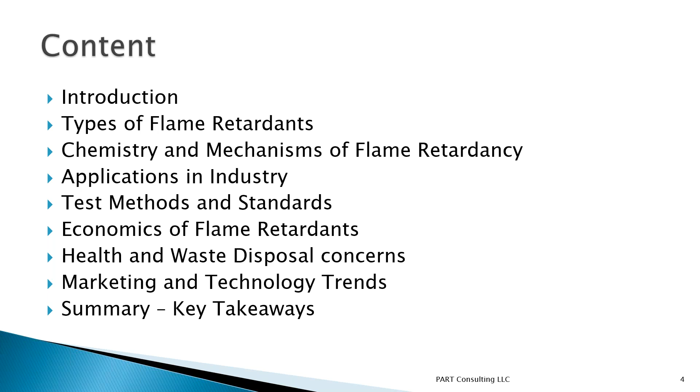And we're also going to talk a little bit about the economics and, very important, the health and waste disposal concerns surrounding flame retardants today, of which there is quite a bit out there. We'll also cover some marketing and discuss the technology trends that are happening today. And finally, at the end, I'm going to give you some key takeaways to view flame retardants and their uses today.

So moving on. The very first thing about flame retardancy is that we have to understand that we don't want to confuse this with flammability resistance. Flame retardant materials have been modified to decrease the effects of combustion. Basically, what they're looking for is to slow down or stop the combustion or burning process, okay? They can still burn, but they're modified. Flame-resistant materials, on the other hand, are materials that are inherently non-flammable, okay?

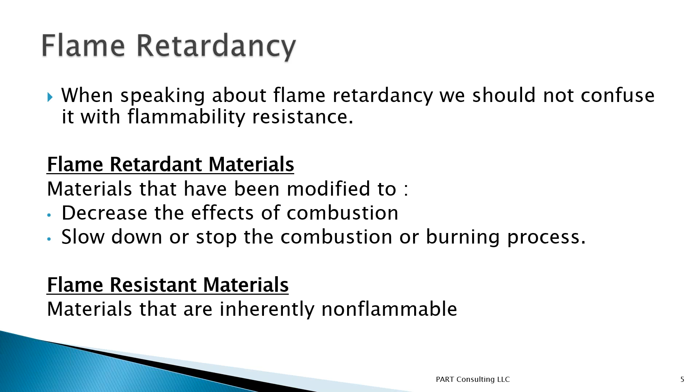So, talking about a fire, we talk very often about a fire triangle. You'll see this in an awful lot of literature, and very simply put, it's a triangle that has one side fuel, another side heat, and another side oxygen. These are the three elements that you need for a fire to burn and continue to burn. You remove any one of these elements and the fire becomes impossible. So, for example, if there was little or no oxygen, a fire could not occur regardless of the quantities of heat and fuel that were present.

Likewise, if insufficient heat is available, you can have any amount of fuel and oxygen and they won't result in a fire. What's not said in this, and what's not understood, is that there's a fourth element, and that is there has to be an ignition source. Unless the temperature gets extremely high, you need an ignition source, and very often it's another flame itself, or it's an electrical spark of some kind. So that's the fire triangle, and that is the mechanisms of fire.

So let's look at the material comparisons. So we have flame resistant, and that's things like asbestos, refractories, cement, ceramic, fiberglass. These are materials that basically are non-flammable: glass wool, minerals, and metals like iron, copper, and others. There are some metals that, under the right conditions, will burn, but generally speaking, iron doesn't burn, it'll melt.

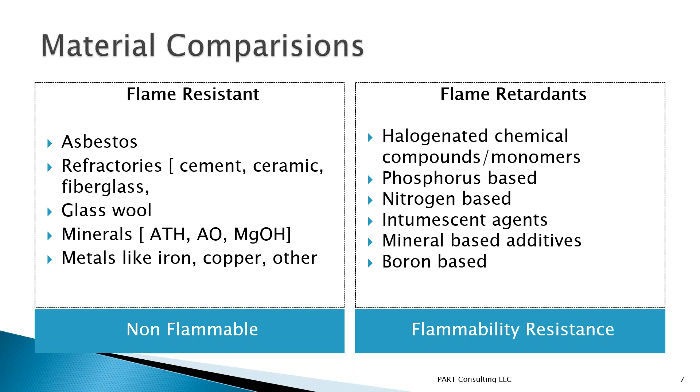And then there are intumescent agents, and we'll be explaining that further. This is usually a combination of things. And there are your mineral-based additives and boron-based flame retardants also. These are the major types of flame retardants that are available in the market today.

When we talk about flame retardants, generally speaking, everyone talks about two classes, okay? The first is reactive flame retardants, and the second is additive flame retardants. Reactive flame retardants basically allow you to pre-react the flame retardant into the backbone of the monomer that makes up the polymer. And so they usually form prepolymers, and these can then be inherently already flame retardant.

Additive flame retardants, on the other hand, are just simply ones that you can put into the formulation mixture at any time, and they do not chemically react. They are basically standalone ingredients inside the mix, kind of like sesame seeds inside bread. Doesn't become flour, doesn't become bread, the seed stays itself.

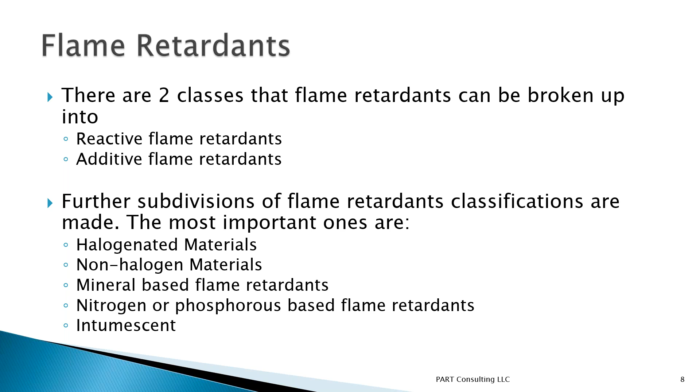The further subdivisions of flame retardant classifications are going to be what I just discussed: the halogen, non-halogen, mineral-based flame retardants, nitrogen and/or phosphorus-based flame retardants, and of course the intumescents. All of these can be additive flame retardants, and indeed they are probably the most predominant flame retardants available today.

The additive flame retardants is a physical mixing of the additive or additive package with the polymer. The additive remains as a separate molecule. This leads to a very flexible manufacturing approach to flame retardant addition. It's quite easy to add it at any step during the processes. It also then, by definition, lowers the cost of manufacturing compared to reactive flame retardants, which adds some extra cost, of course, to work that into the backbone.

However, reactive flame retardants do have their advantages. When they form a chemical reaction with a polymer, it creates a new species. The reactive flame retardant is now permanently part of the polymer. It's not going to separate out. And the issue is that it has to be done, generally speaking, by the chemical manufacturer, because they have the equipment that is necessary to do that reaction on an industrial scale.

The reactive flame retardants are resistant to blooming effects that you can see with additive flame retardants. That is, in an uncured state, when it blooms during the curing process, these materials can come out or separate out of the polymer mixture, and they can form a layer on the surface. Blooming is not a desirable effect, and you don't see it too much today, but it was at one time a particularly difficult problem.

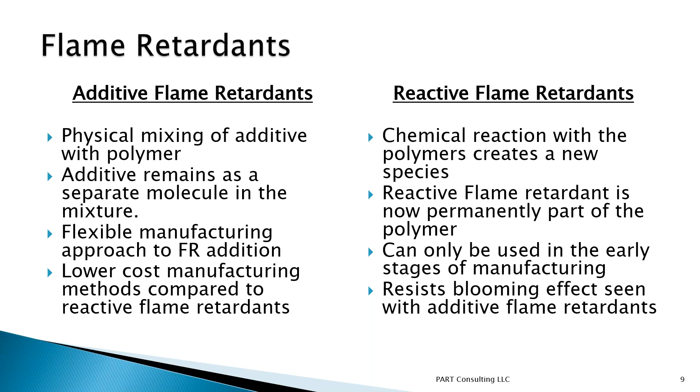Additive flame retardants are simpler. They can be lower cost, not necessarily all the time. And the main advantage is that if you have a formulation, it's much faster to market if you have an additive flame retardant in there. The limitations are blooming. Processing can be difficult on the equipment. Some of these flame retardants can be corrosive, can be abrasive, and they can affect wear and tear on equipment. Also, the disadvantage to additive flame retardants is in some cases, depending on what you're using, you're going to have very high loading levels. It isn't as efficient as reactive flame retardants.

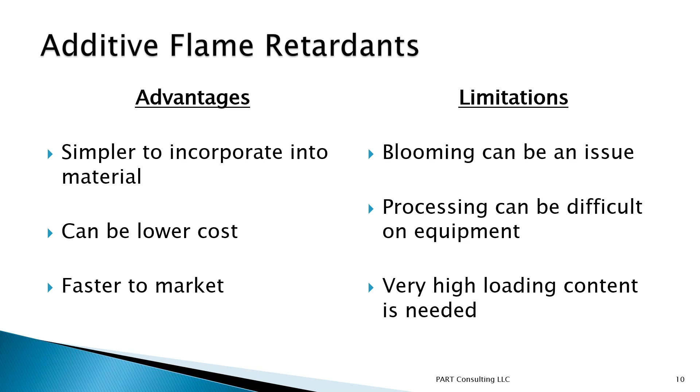The reactive flame retardants, generally speaking, have better properties overall, better physical properties, thermal, mechanical, even electrical. They're typically easier to process because it's a simpler material at that point. It's one material. And they have much higher temperature properties, generally speaking. When you have additive flame retardants, you're dependent upon the lowest performer. The other thing also is for manufacturers, they are a proprietary material, and so they can have a business advantage that way.

The difficulty with reactive flame retardants is that TSCA and REACH can be an issue. If you're making a new molecule with a reactive flame retardant, you may have to TSCA list it and try and get it into REACH, which is time consuming, expensive, and it doesn't happen overnight. There are going to be fewer additives needed with it, and the cost of all of this, of course, can be an issue because it costs quite a bit to TSCA list or even to get something onto the REACH list. So you're looking at a minimum of typically 6 months or 1 year, really, to get at least the TSCA listing. REACH is, I think, even more difficult.

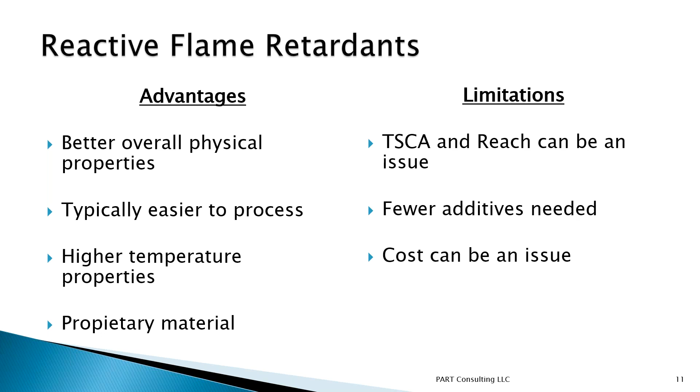Okay, the major places where flame retardants today get used is in furniture, anything from office furniture to household furnishings. Textiles, baby clothes used to have it. Some do and some don't, I believe, today. And it is best known also for industrial work clothing. Electronics are big on flame retardants. Printed circuit boards, cabling, enclosures of all kinds, they all have one type or another of flame retardancy.

Electrical power generation, this is where you have your outdoor cables that bring power to your homes and to your factories from the power plant. Much of those transformers and other electrical devices, they are all flame retardant to a degree. The transportation area has a unique set of flame retardancy requirements.

Aircraft is probably one of the more difficult application areas, but there's also requirements for automotive, trains, buses, and so forth. Building materials: as composites continue to make inroads into the construction industry, flame retardancy is something that is needed. So that is becoming much more of a growing area for them. In actuality, they're using these things as coatings, adhesives, and as composites in a lot of these applications.

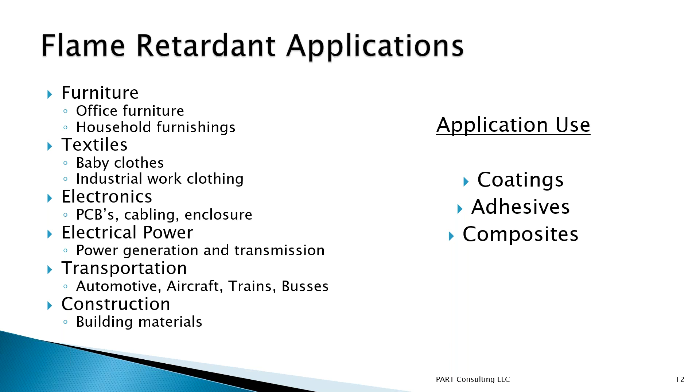So, how do flame retardants work? People break them down into any number of mechanisms. Some of them overlap, but I've broken them down here into three: endothermic reactions, barrier formations, and oxygen disruption. If you think of the endothermic reactions, that's the heat side of the triangle. Barrier formation cuts off the oxygen. And you also have oxygen disruption or temperature lowering, where it works in the vapor phase.

Endothermic reactions basically raise the need for energy consumption to sustain the burn state. Barriers are just simply that: when a flame gets started, the decomposition immediately creates a flame-resistant barrier. And oxygen disruption, your halogens are here. They basically react in the vapor phase, cut off the oxygen, and also interfere with the heat generation needed for fire stability, because they absorb the free radical ions which propagate the fire.

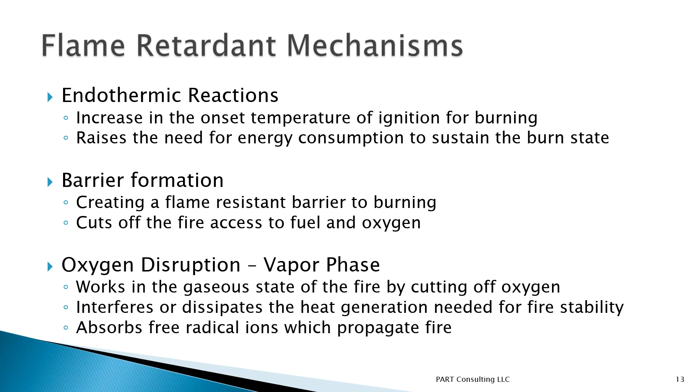So, examples of the fire retardant mechanisms are things like magnesium hydroxide and aluminum trihydrate. All of these things basically do one thing: they break down. The hydroxides and the trihydrates form basically water, so they reduce the heat and put a damper on the flame spread. Barriers are intumescence. Basically, a char layer forms, and it cuts off the oxygen, the access to heat, and the fuel from the flame. That's the way these things work.

Ammonium polyphosphates are typically in many intumescent formulations. Phosphorus flame retardants on their own do the same type of mechanism. And melamine, which is a nitrogen-based flame retardant, works in this manner also. Your gaseous state is brominated monomers, chlorinated monomers, and your nitrogen flame retardants. The melamines also give off nitrogen, which enters the gaseous state, so they work in two different ways. Brominated and chlorinated monomers also form a char layer to some degree, so they're very effective materials.

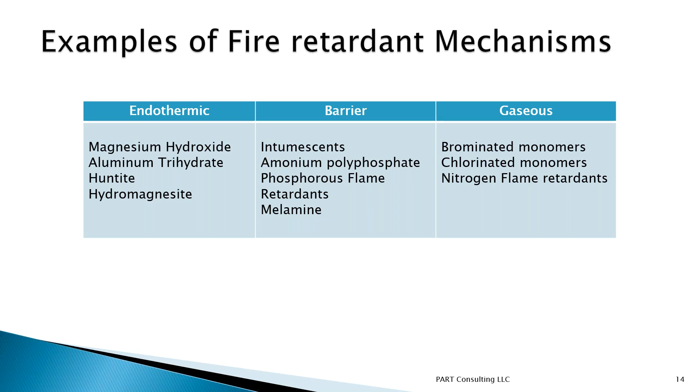Endothermic flame retardants break down when exposed to heat, and the reactions draw off the energy needed to sustain the fire. Basically, it's a fire hose. It releases water, which enters the gaseous phase and cools the fire, and with enough of the additive in there it can actually stop the fire on its own.

Gaseous state reactions involve a lot of chemistry, but basically the components of the flame retardant break down, and in this case you're seeing bromine. Bromine in turn reacts, forming HBr, and that process absorbs an awful lot of heat. The HBr then reacts with other elements in the fire and starves the substrate or the fuel of the oxygen needed to continue burning.

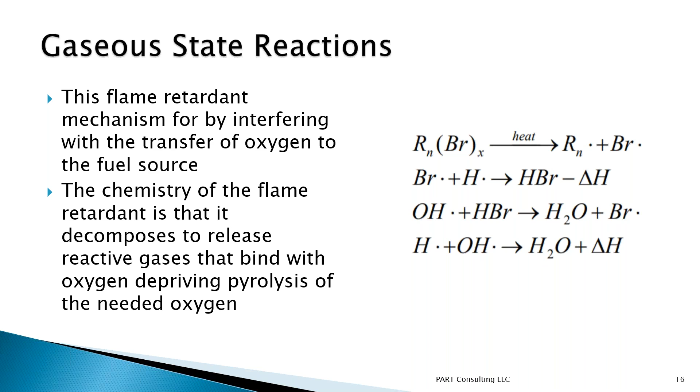I have here intumescent barrier formations, which is somewhat difficult for people to see. So we're going to have a little demonstration with a video from one of the suppliers of intumescent coatings, in this case for cardboard applications. You'll see that the char layer cuts off the oxygen and reduces the heat transfer to the fuel, and in effect it knocks out two legs of the fire triangle. So let me see if we get this started.

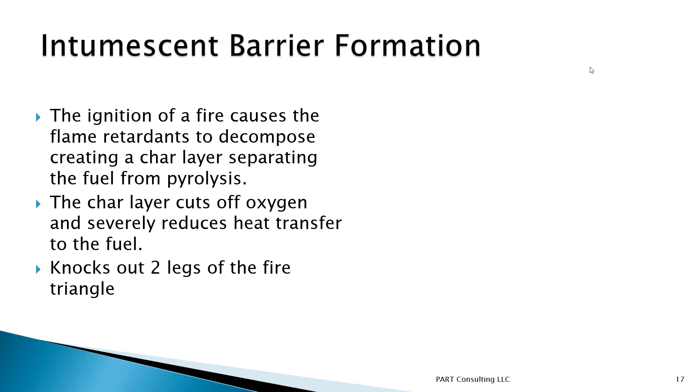Okay. I'm going to put the video on now. And I don't see it running. Rick, what am I doing wrong here? I think you just need to hit play on the video. It shows that it's paused. Oh, hold it. Let me try again. Okay.

This demonstration features standard corrugated cardboard that has been coated with Flame Control 1010. Flame Control 1010 is a solvent-based intumescent coating designed to reduce the spread of flames when subjected to fire. It has been tested by UL in accordance with the ASTM E84 test specifications and assigned a Class A flame spread rating. 1010 dries to a flat finish and has the appearance of conventional paint. On contact with direct flame or excessive heat, 1010 intumesces, or puffs up, to form a dense protective foam layer that checks the spread of flames and retards heat penetration.

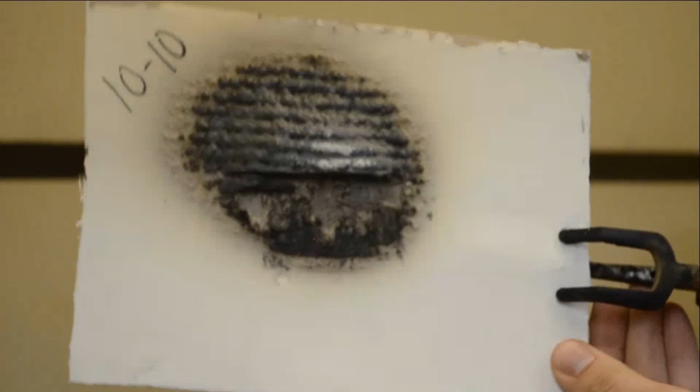As you can see, 1010 creates a layer of char that prevents the ignition of the cardboard substrate. As the char is removed, the cardboard substrate is revealed to be unaffected by exposure to direct flames. Turning the cardboard shows the profile of the charred 1010 and the protective barrier that is formed. As we reverse the cardboard, the substrate is shown to be fully intact and unaffected by the flame. For contrast, when the uncoated cardboard is exposed to the open flame, ignition is almost immediate.

Roger, you have to take yourself off mute.

Roger, not sure if you can hear me, but you need to take yourself off mute. Do you hear me now? Yes. Okay.

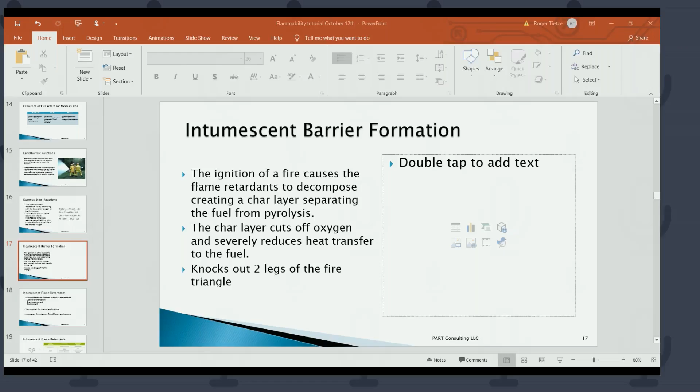Roger, excuse me for just 1 minute. I'm sorry to interrupt you. You need to go back to the screen sharing and reshare your PowerPoint. Okay. Do you see it now, Rick? Yes, thank you. And maybe while I have you paused, I could ask you one question that's been submitted. This might be a good time to do it.

Okay. The question is, could you comment, please, on silica-based systems? Silica-based systems are based basically on reducing flammability. They're really not known as flame retardants themselves. Basically, silica doesn't burn. And silica is used in a lot of formulations actually to reduce the coefficient of thermal expansion. The secondary benefit that they have is that since it doesn't burn, it reduces the amount of flammable material

inside the formulation. So if you add 10% silica, say, to an epoxy formulation, it will reduce the coefficient of thermal expansion. It also reduces the amount of flame retardant that you have to add. And if you keep on adding more silica, the flammability decreases and the coefficient of thermal expansion also decreases. The problem is that eventually you'll add so much silica that you'll end up having a problem as far as having a workable formulation that can be processed.

So there's really not many silica-based flame retardants. It's an inert filler material, and it can reduce flammability. Okay. With that, we'll go on to the next slide for intumescents.

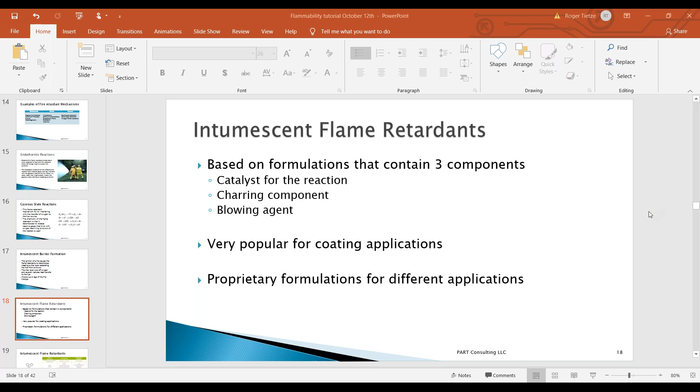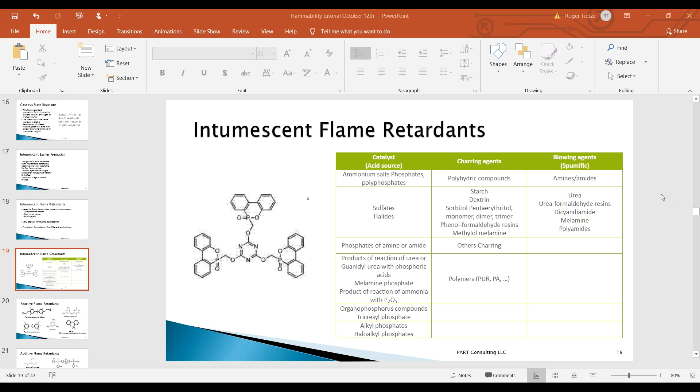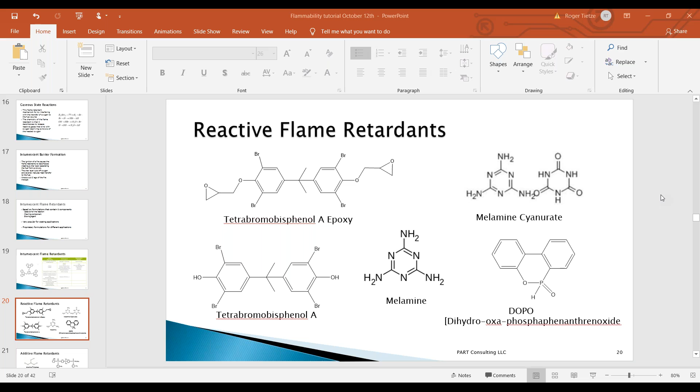On the electronic side, the lower right-hand side, DOPO is one of the phosphorus flame retardant materials. It's been around for quite a while now, about 20 years, as a flame retardant. And it and its many variations are quite common for use in composites and electronics. So they basically incorporate phosphorus into the formulation, and the structure there also forms a very nice char.

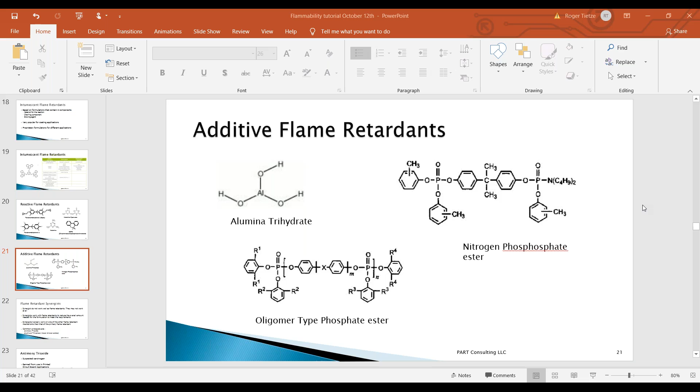One thing also is there's still a lot of applications today that will utilize with the flame retardant the synergist. And synergists basically work with flame retardants to reduce the overall amount needed for the formulation to meet the requirements. Simply put, if you have 20% bromine in your formulation to get V0, by adding antimony, you could reduce that amount that's needed all the way down to 12%, 10% bromine. And there are reasons to use this. It makes the flame retardant more effective. And it also saves costs, and it may even improve the properties.

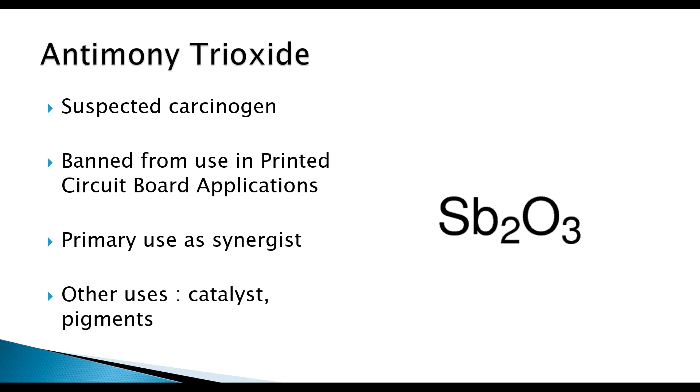It's primarily used today as a synergist for flame retardants. There are some other small uses for it in catalysts and pigments, but quite a few pounds of the material are still sold today.

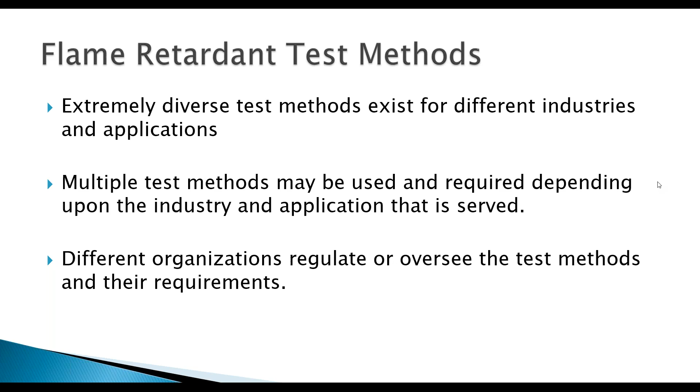We're going to now talk about flame retardant test methods. If you look on the internet, there are an awful lot of diverse test methods today for different industries and their applications. It's not unusual to have, for some applications, more than one test method that is being used, and that you have to meet those requirements. There are also a slew of organizations that regulate or oversee the test methods and their requirements, and many of them are industry specific.

Basically, when you test flammability, you're looking at the ease of ignition. How easy is the material to set ablaze? You want to know how fast the flame spread happens. You want to know how far the burn travels into the material. You are also interested, particularly in the transportation area, in the toxicity of the smoke and the gases. The density of the smoke is measured. Heat measurements are also done because the fires will release heat energy, propagating the fire even more and even faster.

And then there are some other methods, oxygen consumption. And in the case of particularly thermoplastics, you're worried about the drip or the melt byproducts. As thermoplastic burns, you'll form drips, and they can be flaming drips. You're not going to stop the thermoplastic from melting, but you don't want that drip to set something else afire.

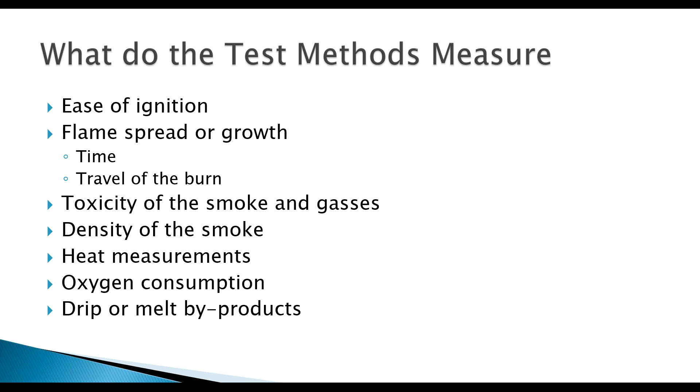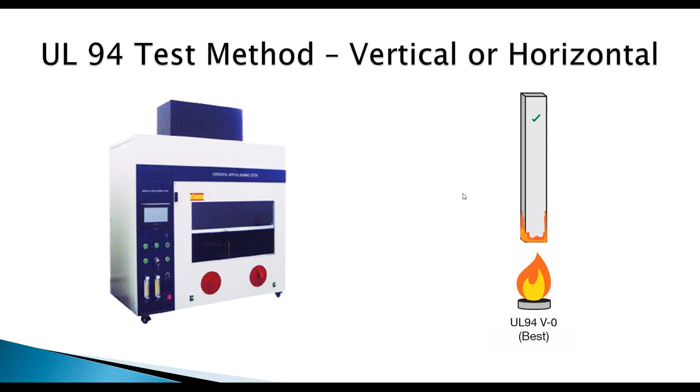It also has requirements for the spread of the flame, and this is done both in the vertical or in the horizontal position of the specimen. Depends again upon the industry and what the application is. It's a very popular test that crosses many applications, and it's maybe only the beginning of the test methods that are used in some industries.

Flame, smoke, and toxicity testing. This is basically aerospace, but this also relates to other areas like furniture, textiles, and so forth. So you're looking at the flame ignition. That is, how long does it take for a specified flame to ignite the organic material. You're checking out the flame spread, and that's measured by how far into the sample the material burns. Smoke density, it gets channeled, and through light measurements, the density of the smoke is looked at.

The smoke's toxicity, how much carbon dioxide is there, how much nitrogen oxide, how much soot, let's call it. Is the smoke black or white? All of these things are tested, and the hazard of the smoke that is released is evaluated. Heat release rates.

This all relates to the way that the material burns. As it burns, is it giving off enough heat to continue the flame? You don't want it to, so you're looking at very low heat release rates, the total amount of heat release that is done when a sample is burned through. And this is all described in the FAR 25.853 test. It's an aerospace standard.

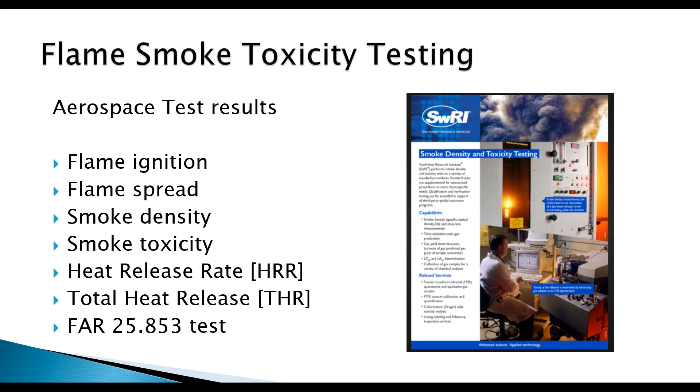Actually, all of this comprises multiple tests and multiple equipment. And all of this is done for things like aircraft interiors, transportation of buses, public transportation. It is even related to things like subways and stuff like that. There's also a military version of this for aircraft.

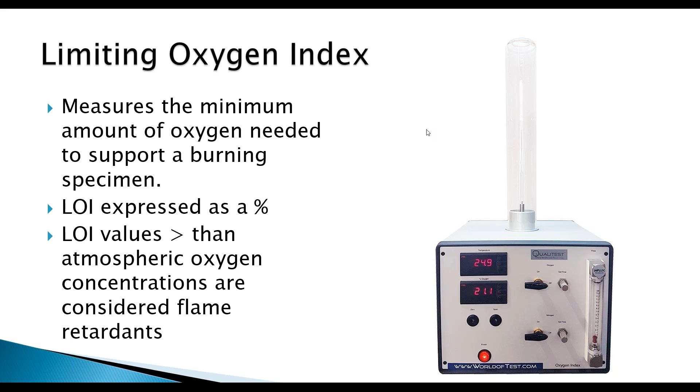Basically, limiting oxygen index values that are greater than atmospheric oxygen are considered flame retardant. So it needs a lot more oxygen than the atmosphere is providing, and so it can be a flame retardant material. It's not widely used as a test standard, since it doesn't account for many other factors that are necessary, but it is a way of finding out if something is flame retardant or not.

Those are the most common tests, but there are actually many, many other tests. All of them involve different burning scenarios. They will build houses, chambers, all kinds of things for testing. All of that is then covered by regulating bodies and trade organizations from different industries. And there are a lot of them, and it's not unusual to have more than one regulating body and more than one trade organization involved in the particular applications.

On top of which you also have consumer groups, which are particularly active in areas of furniture, textiles, and chemical manufacturing. Environmental organizations also have had a large impact on the flame retardant business. And even global organizations have impacted electronics and other applications. Global organizations have been important because they have been setting the market trends and have forced US manufacturers to comply with requirements in Asia and in Europe.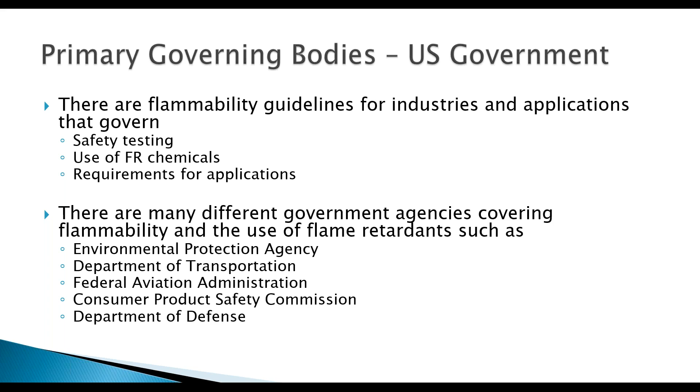Department of Transportation, obviously they're looking at flammability for the public that are using buses, trains, etc. The FAA, very obvious. Planes can catch on fire, and when accidents happen, they become quite an investigation. The Consumer Product Safety Commission has been involved over the years. Many years ago, there were issues with children's clothes in general, because they were allowing people to be exposed to very hazardous chemicals. And then, of course, the Department of Defense has its own set of regulations and guidelines.

One of the best known groups is Underwriters Laboratory. It's a very well-known industry and trade group. It primarily covered the electronics area, but it also oversees many other industrial applications today. The UL94 test is that test from Underwriters Laboratories. It's one of the best and most broadly used test methods today. It's a simple test to perform. You can build your own chamber with the necessary requirements in-house. You don't even have to go out and buy it.

You simply measure the flame spread, time to extinguish, and any generation of flame drips. So it's good for both thermosets and thermoplastics. It certifies products that meet the appropriate flammability requirements. So when you have a UL certification, it means that you have a product that meets the flammability requirements, and you pay for that. That was particularly important in the 50s and 60s when voltages were much higher with electronics and there was a greater risk of flammability.

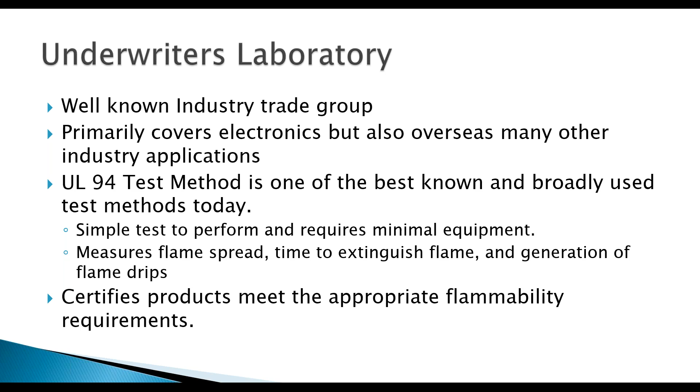ASTM is another area. We all know it for many of the test methods. They are duplicated from specific industry test methods. Usually, the UL94 test does have an ASTM equivalent. It reads exactly the same the last time I looked at it.

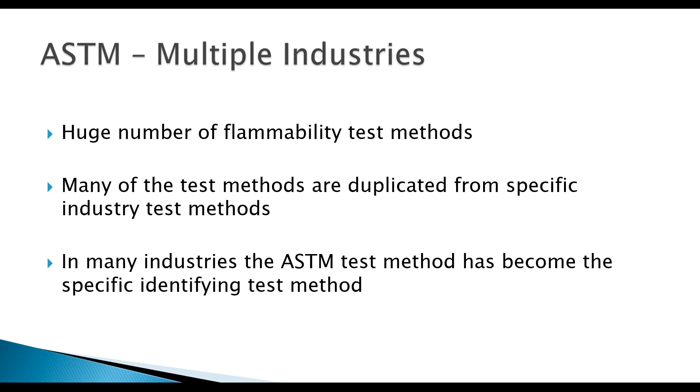And in many industries, the ASTM test method had become the specific identifying test method for that application or industry. I think at one point there were more than 60 different test methods in ASTM. There may be much more today.

Some of the other notable organizations to be aware of: PINFA is a trade organization for non-halogen materials, so basically phosphorus, inorganic flame retardant materials here in North America. The Green Science Policy Institute is an organization primarily for consumer advocates. They're very active as far as textiles and furniture goes. They advocate basically furniture. They question the use of flame retardants in those applications.

The American Chemical Society is involved in trade issues in the science. There's a bromine council for manufacturers. Chlorine almost has dropped off the map, but there are many, many more organizations, and you have to look at them for your particular area.

Flame retardants have health concerns. Over the years, many flame retardants have been banned because of exposure concerns to humans. They're either carcinogens, or they can be materials that impact fetal development, so there's many concerns over them. Also, the end of life concerns with these things have been a big problem because we incinerate everything, and so we're releasing these things into the atmosphere at one time.

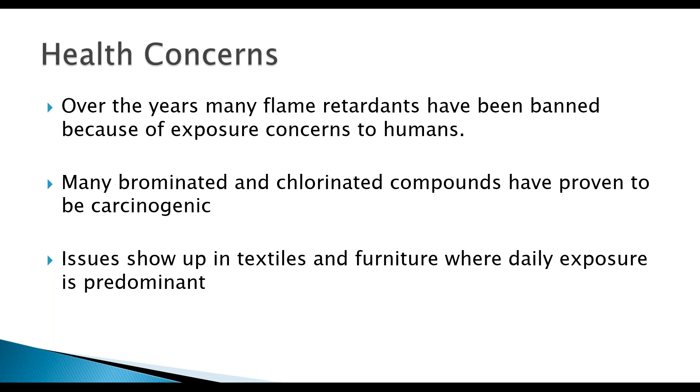Many brominated and chlorinated compounds have been proven to be carcinogenic. Issues many years ago showed up in textiles and furniture, and there are still occasionally some concerns about this even today.

The brominated flame retardant class, one of the primary ones that has been a problem, is the bromodiphenyl ethers. Decabromo, octabromo, all of these were at one time very common flame retardants, and it was once the largest class of flame retardants ever. They're additive materials, they're solids, and in and of themselves, they're usually not a problem. The biggest difficulty with these things is the hazardous decomposition products and the fact that they are persistent in the environment.

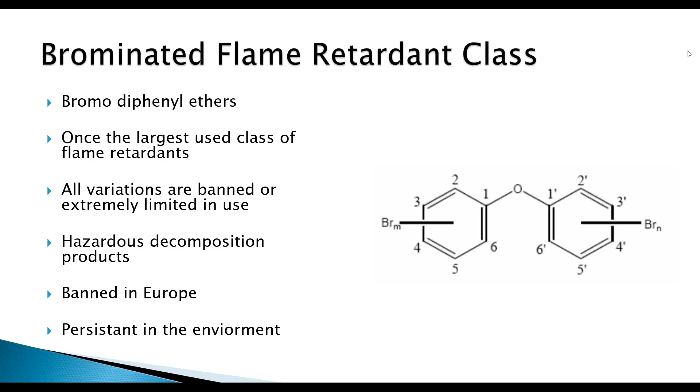Theoretically, they've been banned in Europe, but there are still places and applications that use brominated flame retardants and have been given special leave to do it. But there is a widespread movement away from this. Brominated flame retardants are still used today, and they have this as the major problem.

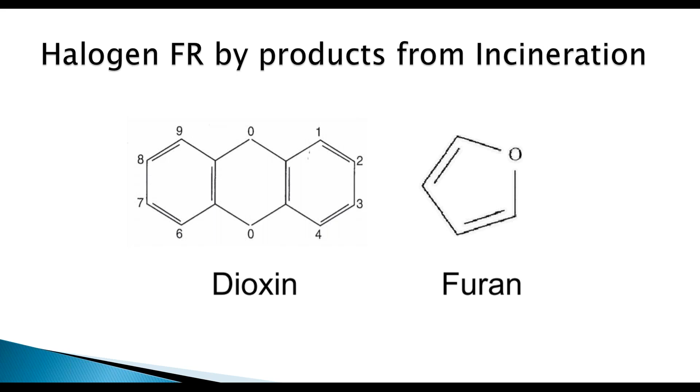When you have electronics with tetrabromobisphenol A or decabromo or any other materials that are flame retardant with them, they take them and recycle them, and they will basically burn them in incineration. And incineration causes these two decomposition products, both of which are toxic. What you're seeing is dioxins and furans that are formed, both in the bromine and chlorine versions. These are very common decomposition products from waste disposal incineration.

Some studies over the years have shown that it is basically a problem with low temperature incineration, around 550 degrees centigrade to 650 degrees centigrade. Both of them are carcinogens. They've also been studied and understood to cause severe developmental problems in infants, and in everyone else, they can damage the immune system.

Bromine has not been as toxic as chlorine. Chlorinated dioxins and chlorinated furans are very toxic, but bromine and chlorine, as a result, are today regulated in this. These do not form when you drive up the incineration temperatures to about 700 degrees centigrade, something greater than 650, so the amount is either reduced or doesn't even show up.

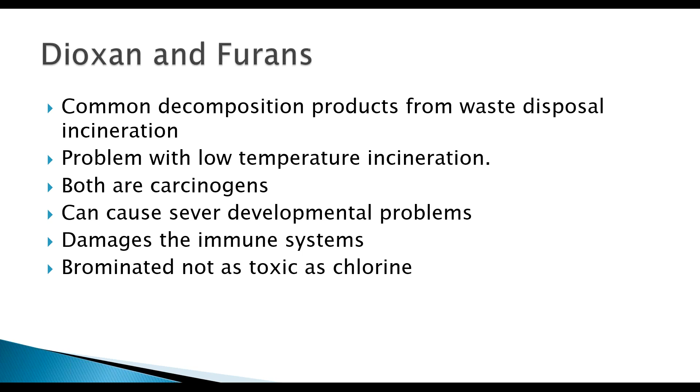But that's why both Asia and Europe basically started the non-halogen movement, because their incinerators operated at lower temperatures, and so they were releasing these things into the environment. The US runs at higher temperatures.

Okay, there's more than 2 million tons of flame retardants that are sold in the world. The leading applications are construction, electronics, and transportation, just on a volume basis. The furniture and textiles areas have smaller and possibly declining applications.

I found it interesting, but at Wayfair, if you go online, you can find furniture with bromine and the equivalent without bromine. So your couch or your table that you want can be flame retardant, or it can be not flame retardant, your choice. And they're not the only ones.

The biggest area that is growing is the non-halogen flame retardants. So some old flame retardants are making a comeback, and new ones are making gains against the brominated and chlorinated flame retardants of the past.

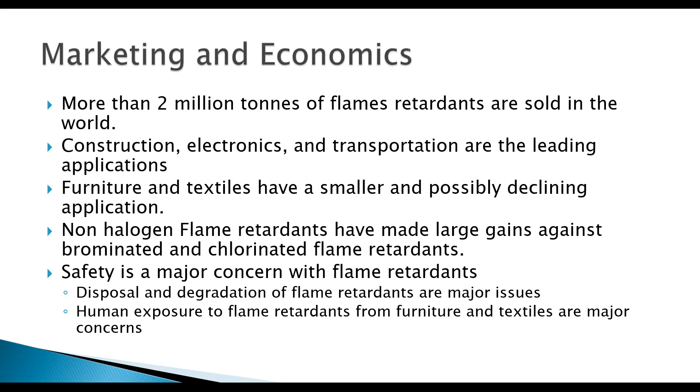Safety is a concern with all of the flame retardants. Disposal and degradation are major issues. Their persistence in the environment should be added here as a major concern also. Human exposure to flame retardants from furniture and textiles, even today, as late as 2020, is still a concern from consumer groups that are advocating their elimination, particularly putting forward initiatives in California. So California is probably ahead of everybody else as far as regulating these materials.

So as I said, the development has shifted basically to non-halogen flame retardants today. There is much more interest in mineral flame retardants. They're not as effective, but they are safer, cheaper, and they're finding ways to work with them. As much as they have some drawbacks, people are re-looking at them. They're looking at things even like silica. This is where the silica came in too.

There is interest in reactive flame retardants without the bromine or chlorine. Things like DOPO have come on in the last 20 years. There are also some patents on boron flame retardants. I know because I have one. Nitrogens: melamine's been around for quite a while, and other nitrogen flame retardants have been patented. Even sulfur, contrary to popular belief, is being seen as a possible flame retardant material.

The other unintended consequence of all of this is that the use of polyimides, benzoxazines, and/or phenolics as alternatives to epoxies has been pursued. In electronics, benzoxazines have found a niche in non-halogen applications simply because they are materials that do not burn as much as the epoxies do. Whether it's an epoxy, a polyester, or even a polyurethane, benzoxazines basically do not burn as much as them. So you either don't have to flame retard them, or you're adding a lot less of the flame retardant in them, which improves performance, and it can also reduce the cost. So benzoxazines, phenolics, and polyimides are finding new life as materials that inherently burn less.

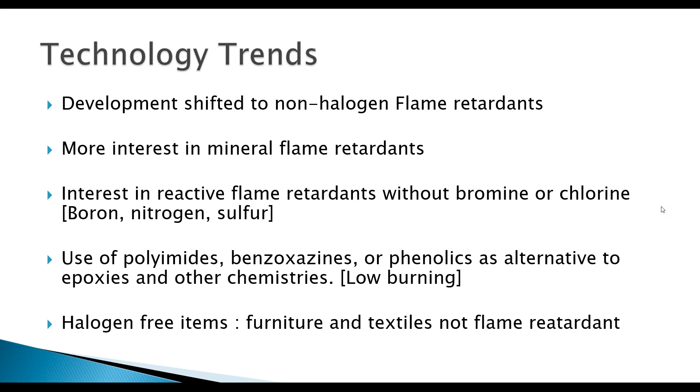You get halogen-free items, furniture and textiles that are basically non-flame retardant. And they do have a place today because, unlike years ago, people do not fall asleep in the chair with a lit cigarette and an ashtray. So there is less and less a need for some of these things, and some people are actually allergic and/or have had adverse reactions with furniture that has halogens, and there have been some documented cases of that.

So, all in all, the key takeaway is that environmental and health concerns dominate in pretty much all markets where flame retardants are used. Today, the trend in question is, do you even need flame retardants at all? Whether it is furniture or the cell phone you carry today, it is most likely to be a non-halogen based material. But electronics today are using less and less voltage, fewer amps. And with such low power, the question is, do you even really need a flame retardant at all? They haven't changed the requirements yet, but it is being discussed in various industries.

California, as far as regulation, is leading the way to banning flame retardant chemicals or limiting their use. And R&D today focuses pretty much exclusively on non-halogenated materials, primarily phosphorus. And these phosphorus and other non-halogen flame retardants have grown in many, many applications. One thing to note: even in electronics today, 60% of the infrastructure electronics, I'll call them, still use brominated flame retardants because of their superior performance. In consumer electronics, that is where halogen-free materials have come to the front.